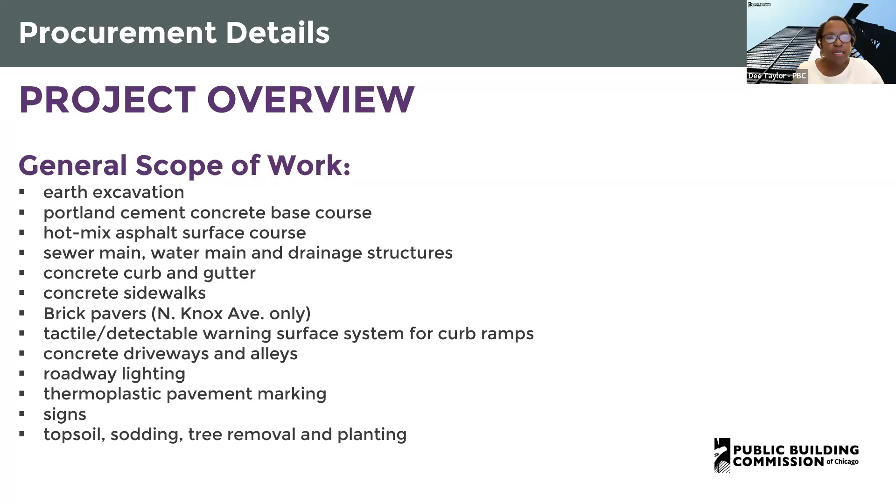The general scope of work includes earth excavation, Portland cement concrete base course, hot mix asphalt surface course, sewer main, water main, and drainage structures, concrete curb and gutter, concrete sidewalks, brick pavers for North Knox Avenue only, tactile detectable warning surface system for curb ramps, concrete driveways and alleys, roadway lighting, thermoplastic pavement marking, signs, topsoil, sodding, tree removal,

and planting. The contractor will be required to prepare a phasing and logistics plan within 30 days of issuance of the notice to proceed, which is the NTP, for review and approval by both CDOT and PBC prior to the mobilization and commencement of any work.

The contractor shall also be responsible for providing critical submittals, including electrical lighting, which is poles and luminaires, sewer and water main, and concrete mix design as determined by the PBC within 30 days of issuance of the NTP.

The project includes City of Chicago Department of Water Management, DWM, lead service line replacement work with 2 service lines at West Bryn Mawr Avenue, North Lawler Avenue, CDOT B5 253. DWM requires approximately 2 days per location to perform the work.

DWM's work is anticipated to commence Q3 of 2025. Upon contract award of the new WPA projects, a meeting will be scheduled to review and confirm any and all coordination items, including DWM's planned work activities. The contractor will commence work on West Bryn Mawr Avenue and North Knox Avenue first in their sequence of work and coordinate all site logistics with CDOT and the PBC.

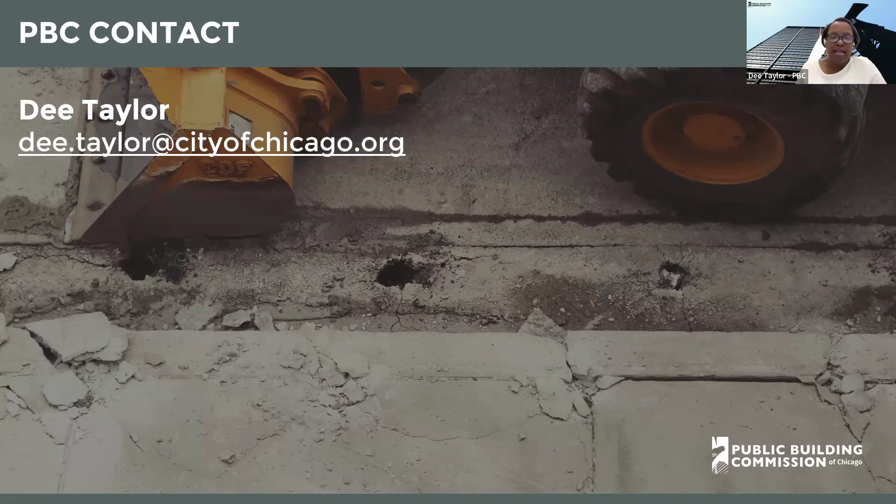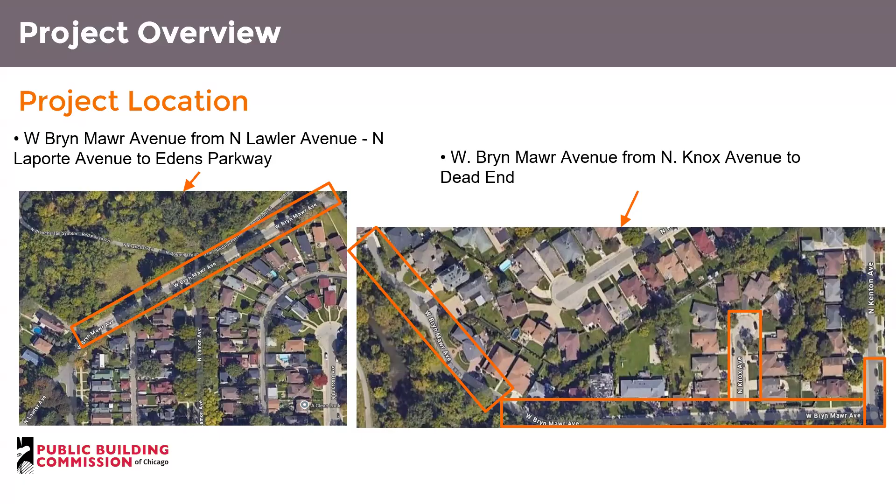So just to go over the project locations again: the first project is West Bryn Mawr Avenue from North Lawler Avenue and North LaPorte Avenue to Edens Parkway. The second project location is West Bryn Mawr Avenue from North Knox Avenue to dead end. I'll introduce Jeff Orzik from Grafe Engineering and his team to go over more specific details for the technical review. Jeff?

Thank you, Dee. The first location we'll look at is Bryn Mawr at Knox to a dead end. If you're not familiar, Bryn Mawr is north of Foster and south of Peterson. This location is east of Cicero, immediately north of the North Branch of the Chicago River. So what we'll be taking a look at are the existing conditions, the proposed conditions after the project is completed, and any local coordination.

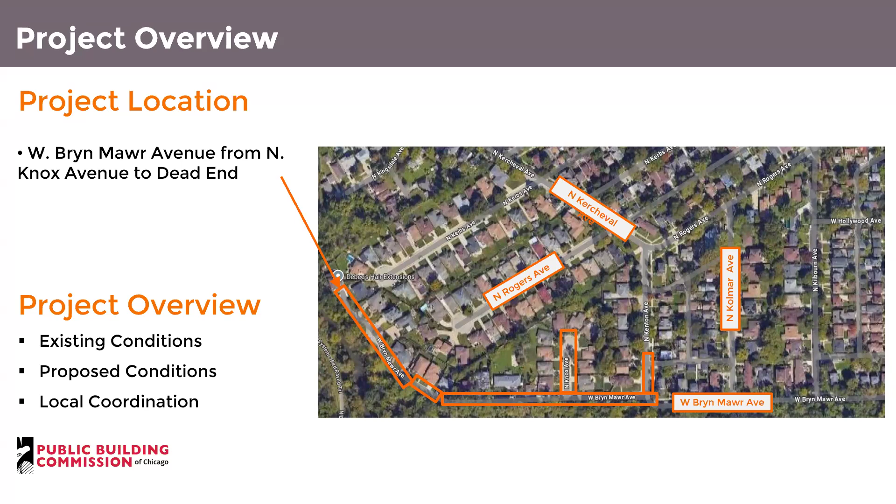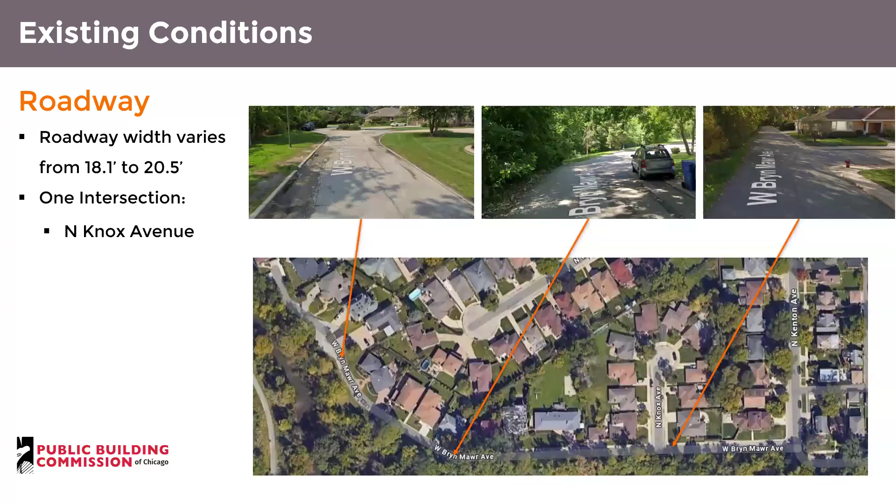The roadway is asphalt pavement with a narrow width between 18 and 21 feet, as shown in the detail. There's going to be one intersection at Knox Avenue, which is a cul-de-sac road, and this basically will extend west to a dead end.

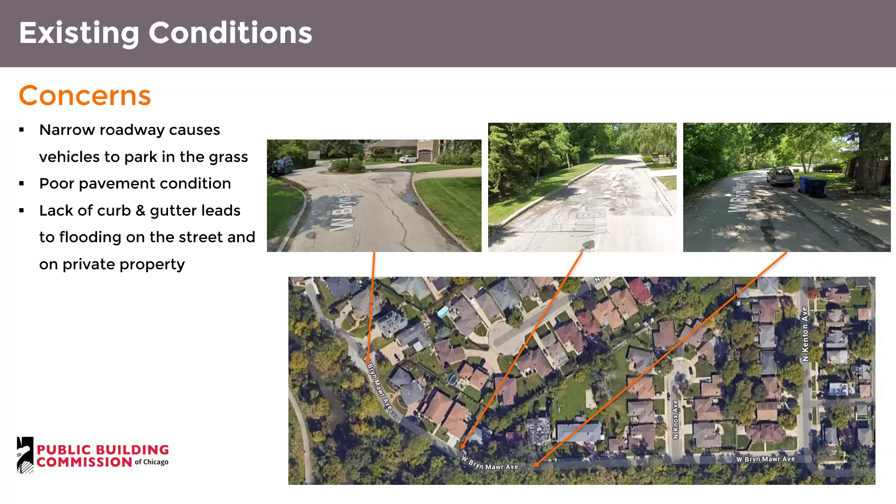The existing conditions and concerns are that the narrow width of the road causes vehicles to park in the grass, which rips up the grass. There's also the lack of drainage, which has caused poor pavement conditions. You can see the cracking in the photos, and the lack of curb and gutter causes flooding on the street, especially onto private property, which is a concern.

For the proposed conditions, we're going to alleviate this by installing curb and gutter and directing the flow into the curb system, keeping the water from going onto private property. This will also allow us to reconstruct the driveway and alley aprons to city standards for drainage purposes and improvement of conditions.

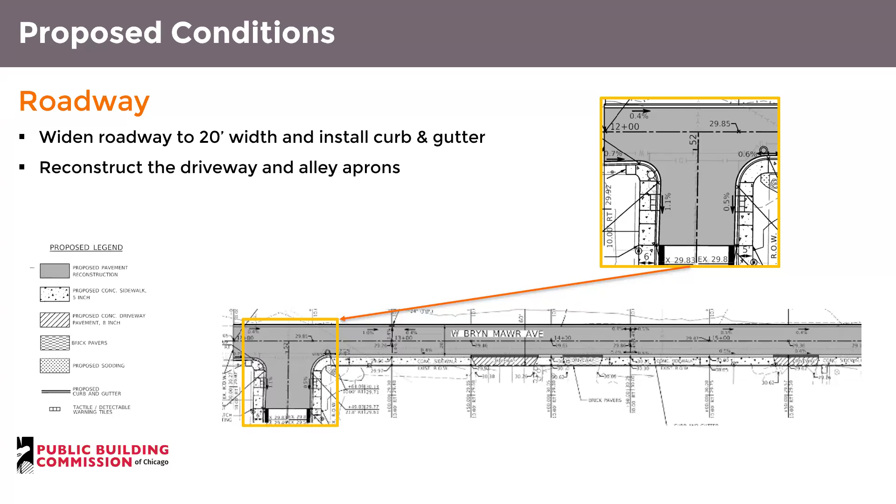The sidewalk is going to be reconstructed fully to provide continual access along the south side of Bryn Mawr. This will help the pedestrians. Also, we'll be installing some ADA compliant access.

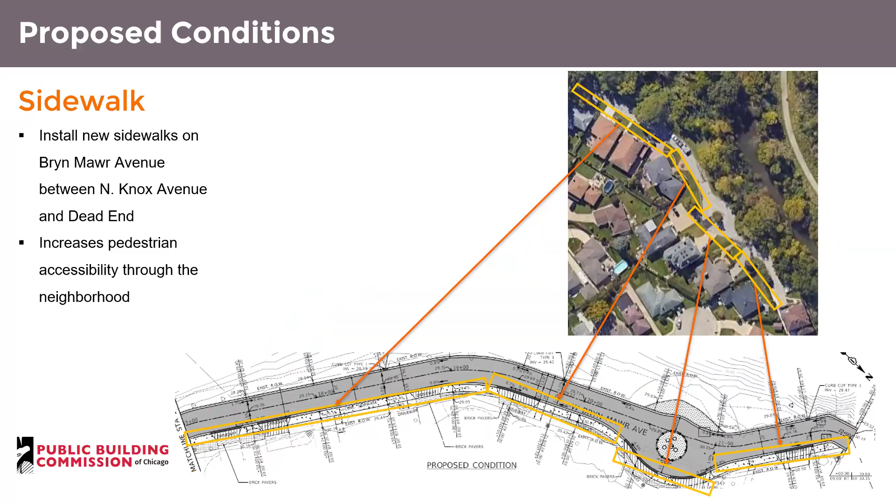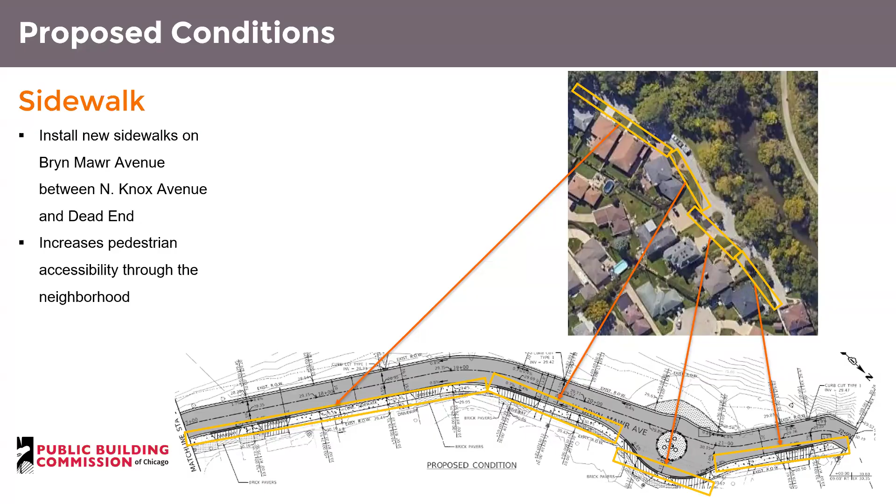As you can see, we're continuing through on this slide all the way through on the south side. You see there's the little traffic circle that's on Bryn Mawr at the flare out. One of the primary goals of this project is also to help the residents with a continual ADA compliant sidewalk, as I mentioned before.

On Knox Avenue, we are going to be constructing sidewalk. There's no pavement work, but there is new sidewalk all the way around through the cul-de-sac.

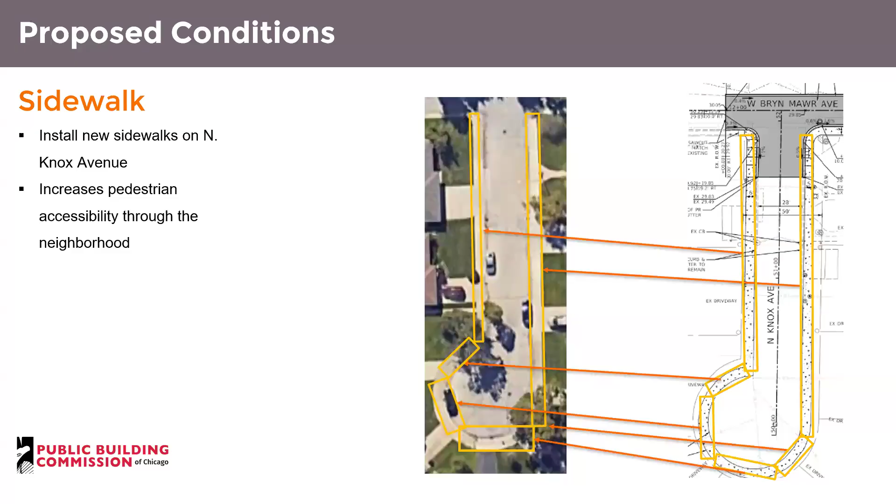The photos show that we're going to be constructing modern ADA ramps for ADA compliance at the intersections, and we would also make these ADA compliant locations at driveways and any alley locations. Also, by installing new pavement markings, it'll help delineate the best pedestrian crossings.

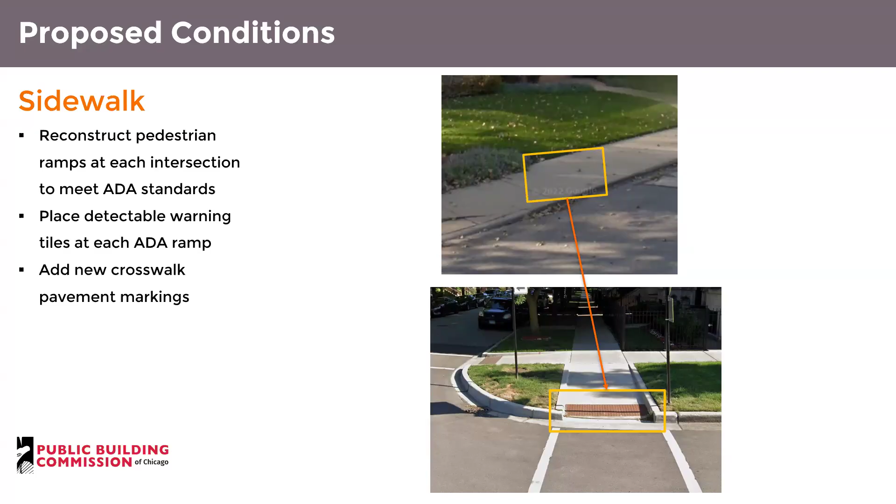There is no parallel parking allowed under the existing conditions or the proposed conditions. There will be no parallel parking either.

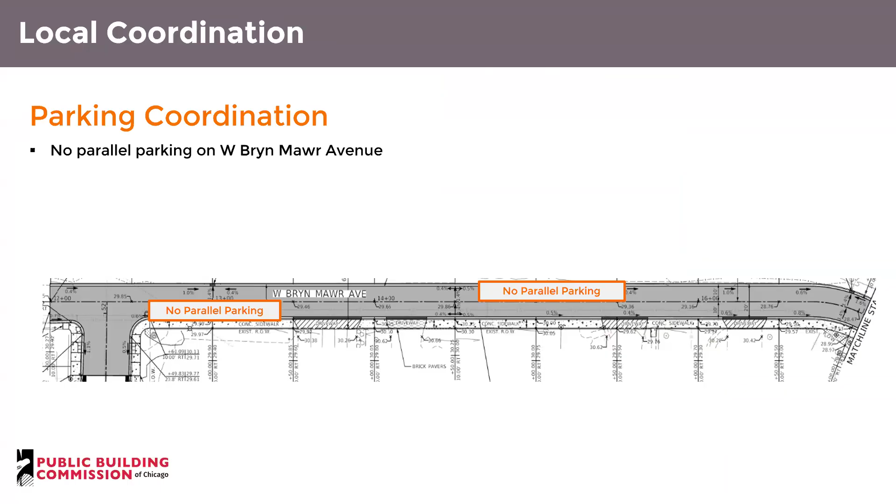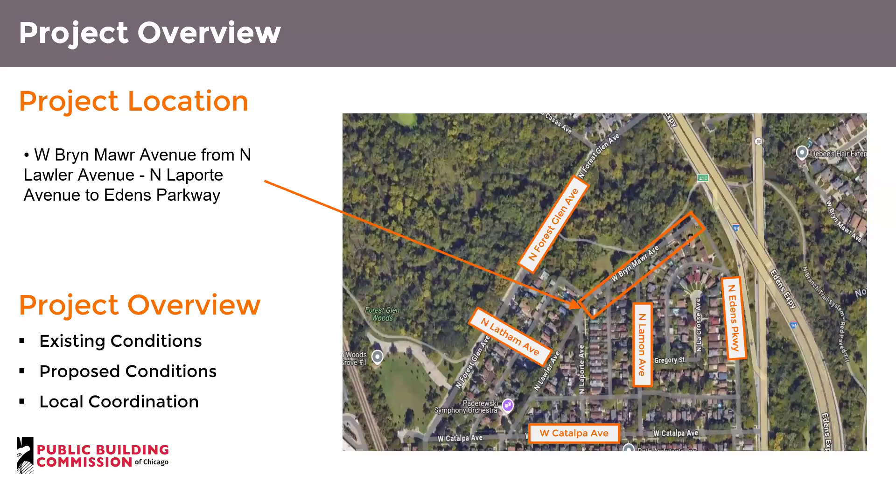The second location is also Bryn Mawr, immediately west of Cicero. You can see Cicero is 50 feet over there. It's also between Peterson and Foster, and this location is immediately south of the North Branch of the Chicago River, going from the Edens Parkway to LaPorte. In this portion of the technical review, we'll be looking at the existing conditions again, the proposed conditions, and local coordination.

The roadway varies in width from 25 to 45 feet, so it's wider than the previous location. It also intersects with Lamon Avenue. We've got existing asphalt pavement, and you can see the alligator cracking caused by poor drainage.

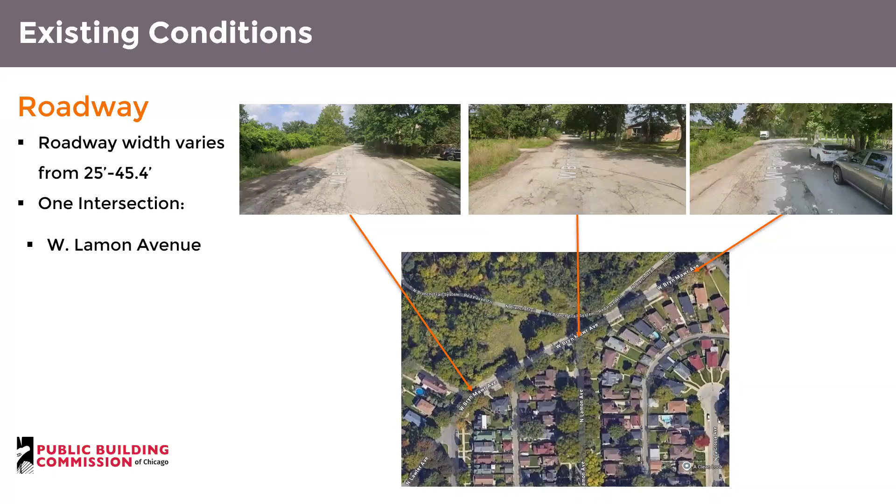There are narrow locations of the roadway, even though it varies. Without curb and gutter, the water stands on the pavement, doesn't drain well, and it also backs up onto residential lots, and it can cause flooding.

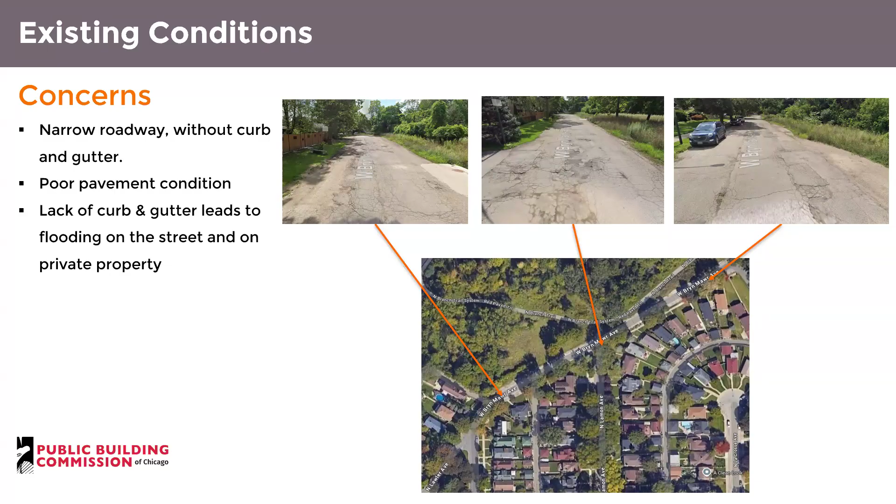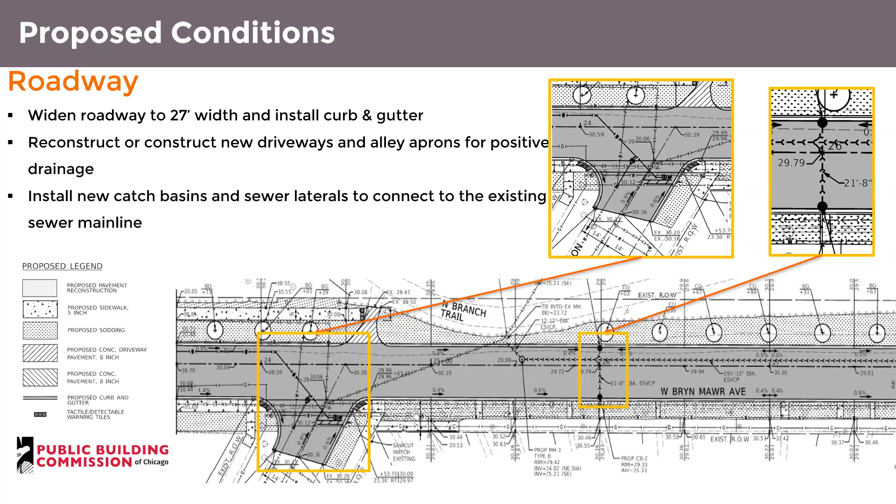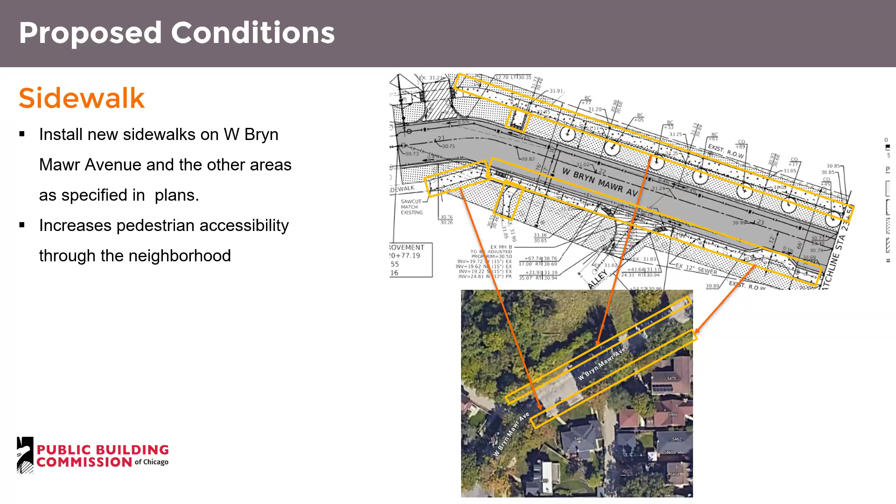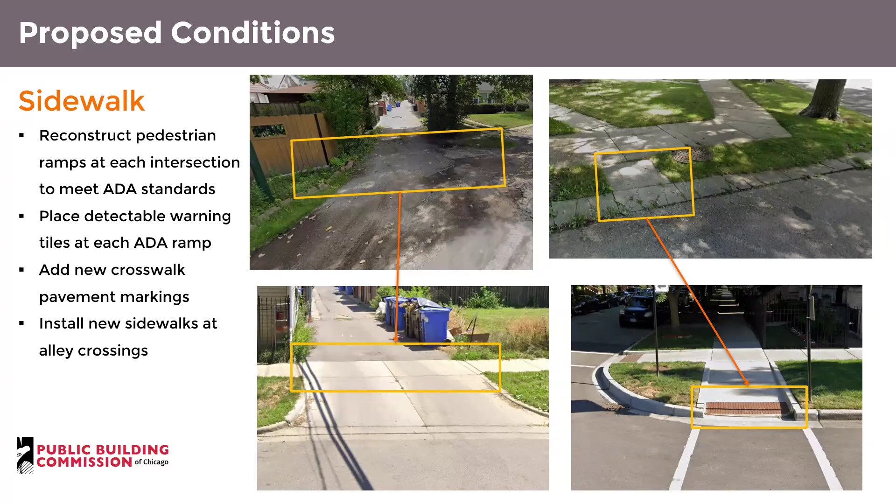In these situations, we see some of the poor typical conditions we have at an alley where we don't have a modern crossing, and you see the drainage and all the mud. These things accumulate and make things tougher for pedestrians. So these locations are going to be reconstructed with modern standards so that pedestrians are able to traverse the locations, especially for people with ADA necessities. We would also be adding pavement markings.